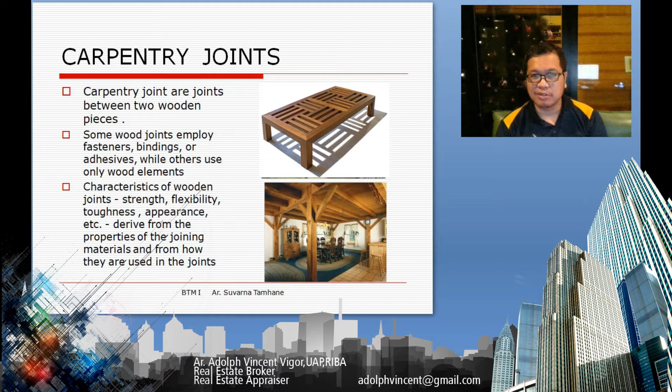So these are the traditional timber joints. Remember this, this is the first part A. This is part B, these are the non-traditional timber joints.

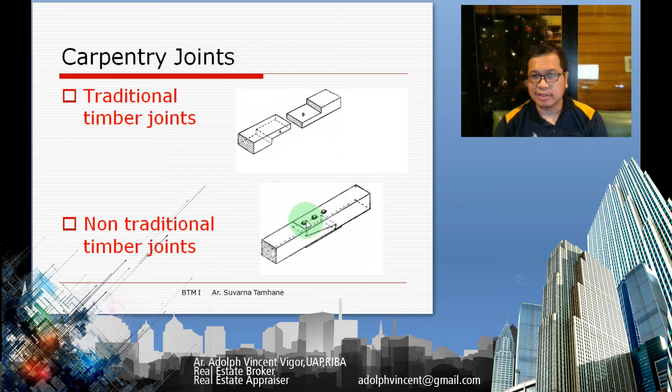So these are the types of joints: lengthening joint, widening joint, bearing joint, framing joint, angle or corner joint, and oblique shoulder joint.

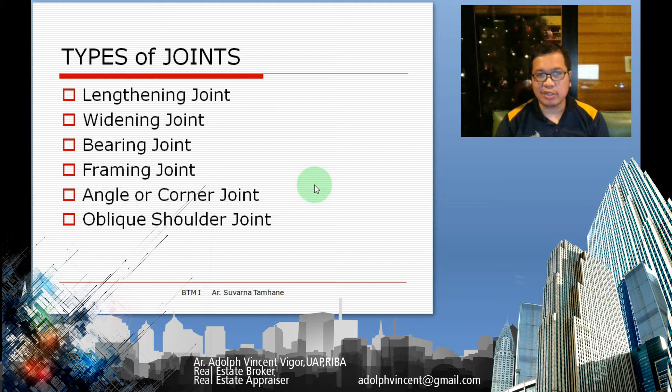A lengthening joint is a lap joint, used extensively in construction and cabinetry for framing. It's quick and easy to make and provides reasonable strength through a good gluing surface. They may be reinforced with dowels or mechanical fasteners to resist twisting. This is the example here, class.

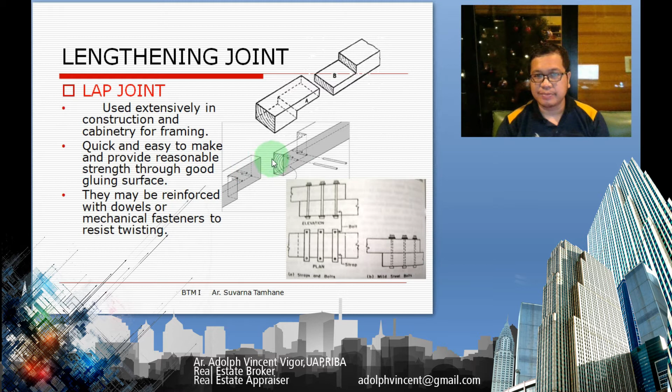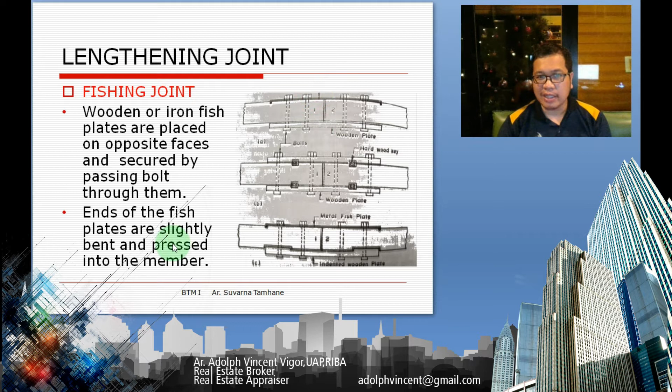Then you have a fishing joint, a type of lengthening joint in which wooden or iron fish plates are placed on opposite faces and secured by passing a bolt through them, just like this one—this is a bolt. The ends of the fish plates are slightly bent and pressed into the member.

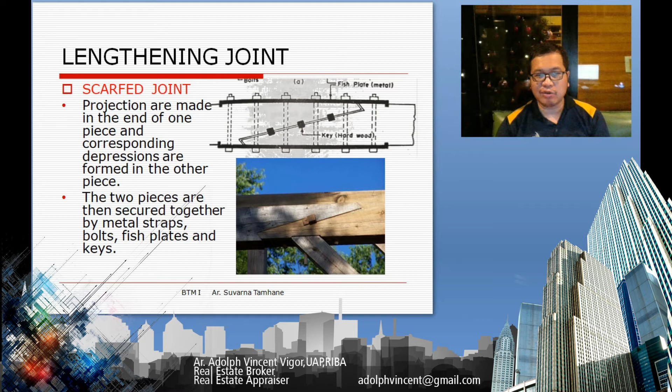Then you have what you call the scarf joint. This is a sample of the picture here. Projections are made in the end of one piece and corresponding depressions are formed in the other piece. The two pieces are then secured together by metal straps, bolts, fish plates, and keys.

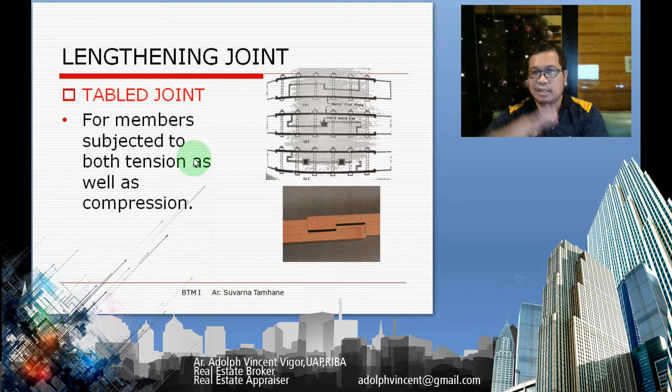Then we have a tabled joint here, for members subjected to both tension as well as compression. When you say tension class, it's like pulling two things together, and compression, like that. This is an example of a tabled joint here.

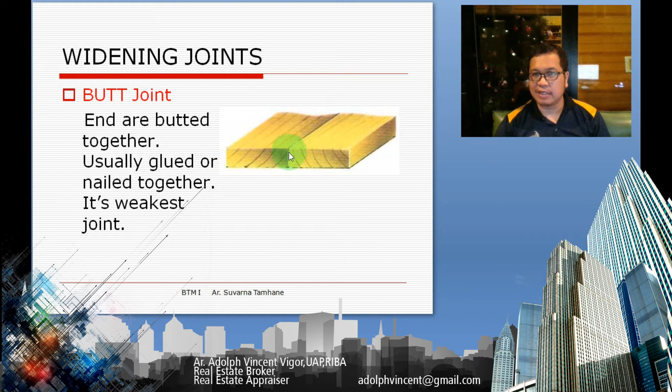Then you have widening joint. So you have a butt joint—the ends are butted together, usually glued or nailed together. It's the weakest joint. Example of this is like this. This is a butt joint.

We have a dovetail joint—a dovetail shaped key to fit in corresponding grooves. If this is a groove here, class, in order to fasten them together, you're going to fit in a key. I think this is similar to the Japanese construction techniques.

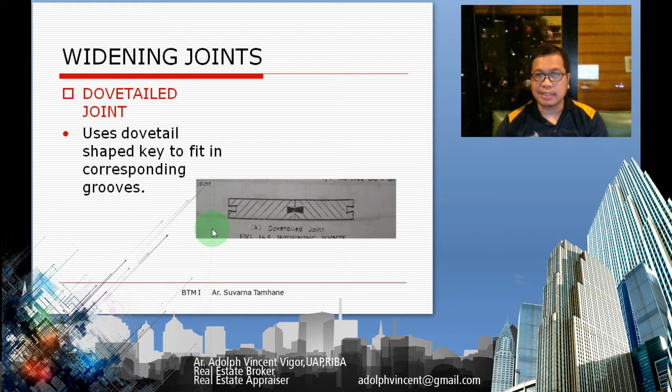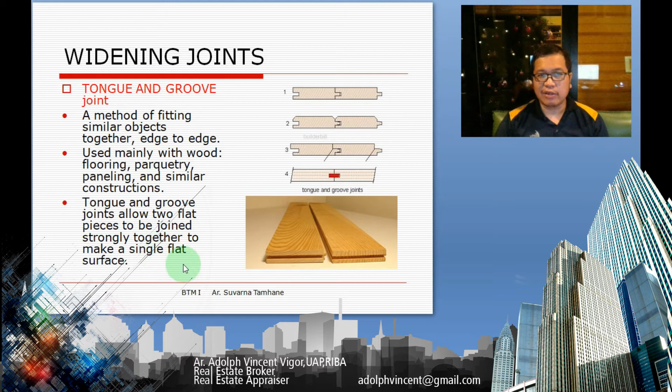Then you have the most common, tongue and groove—a joint method of fitting similar objects together edge to edge. Used mainly with wood flooring, parquetry paneling, and similar constructions. Tongue and groove joints allow two flat pieces to be joined strongly together to make a single flat surface. This is an example, guys.

Then you have a bearing joint—this is a dovetail joint. You can see here it's like the tail of a dove. They form a box joint where the fingers are locked together by diagonal cuts. The sides of each half of the joint are cut at an angle of about 30 degrees so that when the joint is assembled, the separate pieces are locked together. It's stronger than a lap or butt joint.

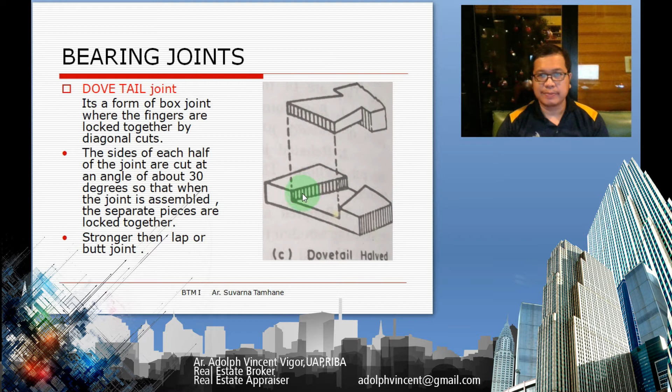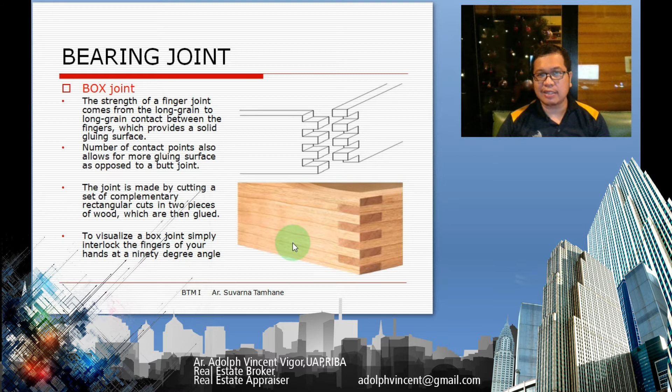Then you have a bearing joint—this is quite interesting, this is a box joint. The strength of a finger joint comes from long-grain to long-grain contact between the fingers, which provides a solid gluing surface. The number of contact points also allows for more gluing surface as opposed to a butt joint. The joint is made by cutting a set of complementary rectangular cuts in two pieces of wood, which are then glued together. To visualize this, simply interlock the fingers of your hands at a 90-degree angle. So it's like this, okay.

Example here is a mortise and tenon joint, another type of bearing joint. The mortise and tenon joint is simple and strong. The tenon is formed at the end of a member, generally referred to as a rail, and inserted into a square or rectangular hole cut into the corresponding member. This is an example—you can see here, this is a projection, this is a depression, and you just place them together. So this is a mortise and tenon joint.

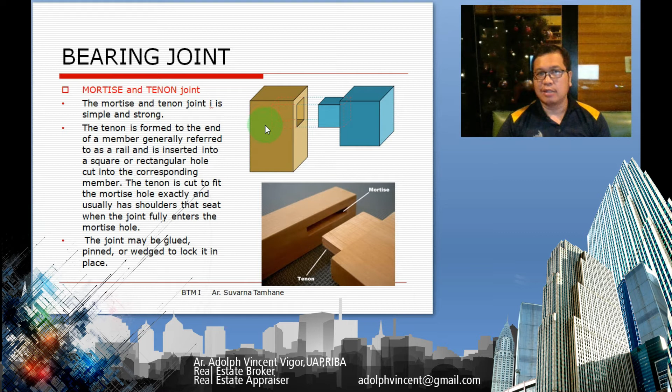Then you have a bearing joint—it's a half joint: angle half, bevel half, dovetail half, longitudinal half, and T half. This is an example here: this one is the angle half joint, the bevel half is a dovetail half joint here, this is a longitudinal half, and this is a T half joint.

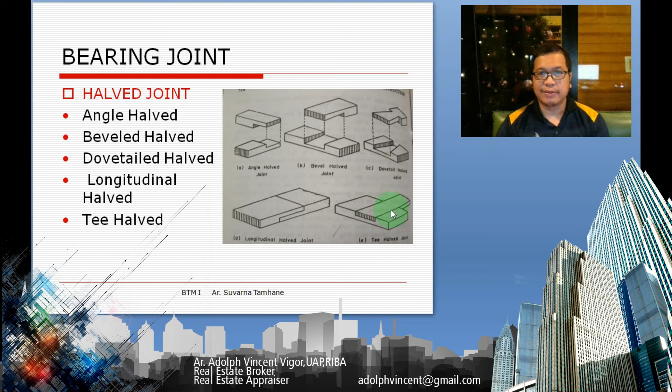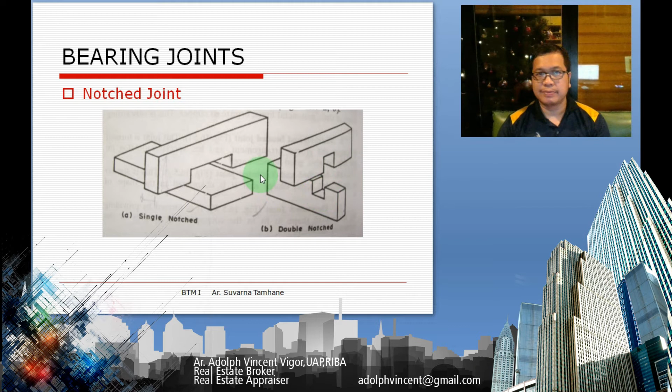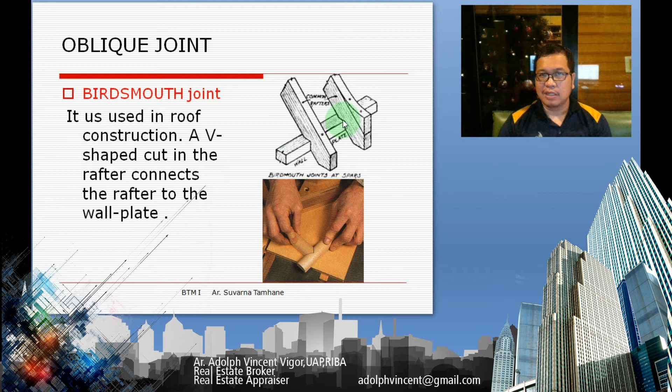Then you have what you call a birdsmouth joint, used in roof construction. A V-shaped cut in the rafter connects the rafter to the wall plate. As you can see here, if this is your rafter, this here is your V cut, and you're going to place it on the plate here, and nail it at these sides.

And you have the oblique joint, used in members to be meet at acute or obtuse angles. Examples are timber trusses. So here, this is an oblique here, and you're going to place a bolt to connect them together.

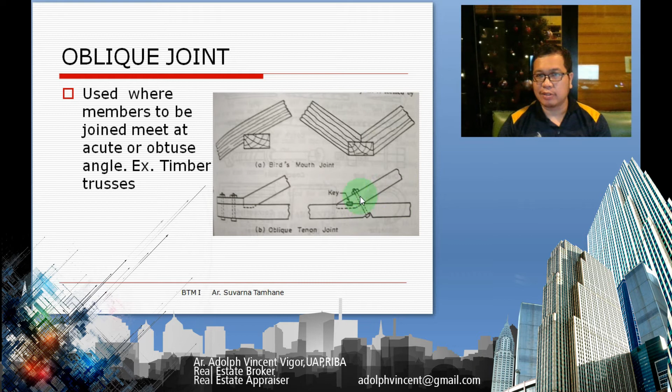Then you have an angle joint, used to join corners of frame. So you have the butt joint, the groove and tongue, the plain mitered and feathered, shoulder house, dovetail house tongue, and groove and mitered.

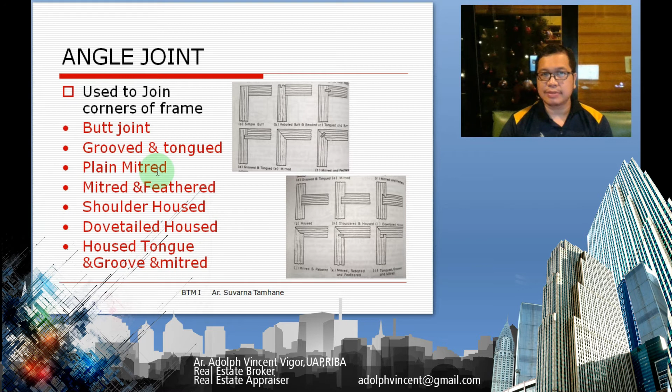Then you have the carpentry joints. There's a traditional method of improvement. Dowels, a small rod, is used internal to a joint to both help align on glue up and permanently strengthen the joint. Traditional joints are used with natural timbers as they do not need any other materials other than the timber itself. For example, here, the butt joint.

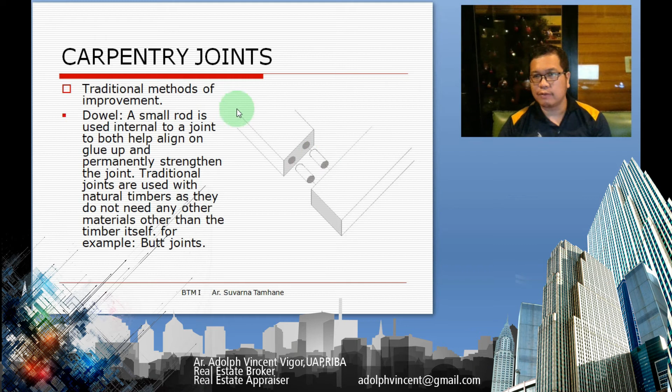No, it's not a butt, it's a carpentry joint. But still, you're connecting from end to end. We're going to use this as a connection between the two pieces of wood. This is a double notch joint here. So this joint is commonly provided at the junction of two members at a right angle.

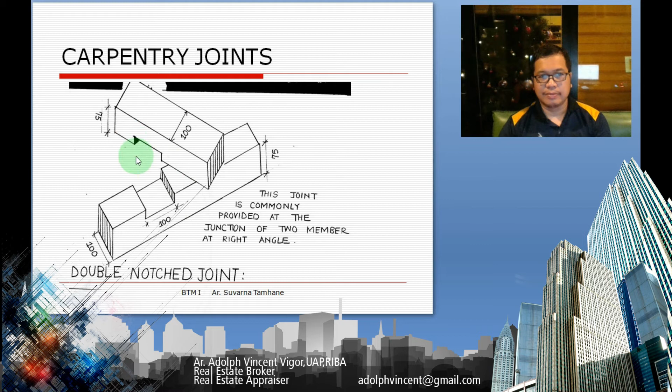This is another type of joint frequently adopted in framing wood. This is an open tenon and mortise joint. I think this is a more complicated class than the other joineries. I think the challenge, especially here in the Philippines, is to cut this into the exact dimension so that it would fit together. But I think you could easily do that if you use power tools.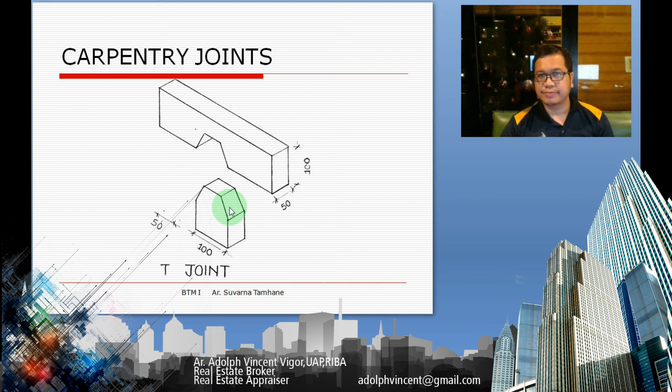And you have a single notch joint. This joint is commonly provided at a junction of two members meeting at right angles.

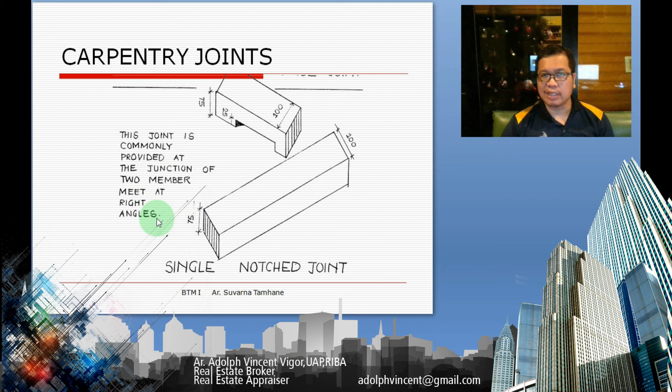Then you have a step joint. This type of joint is used in flooring, paneling, etc. This is known as the widening or side joint. So you can just imagine, class, how complicated this would be, the amount of skill needed to do this type of joineries.

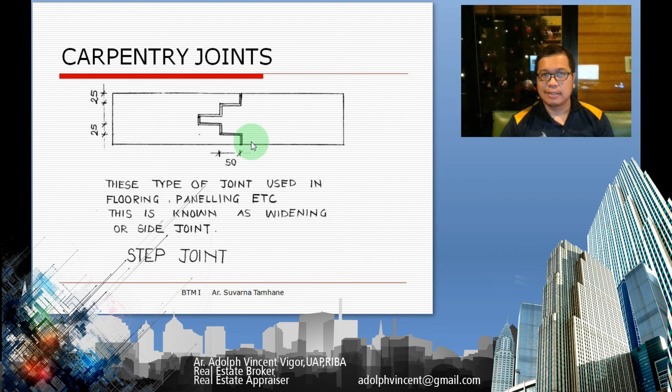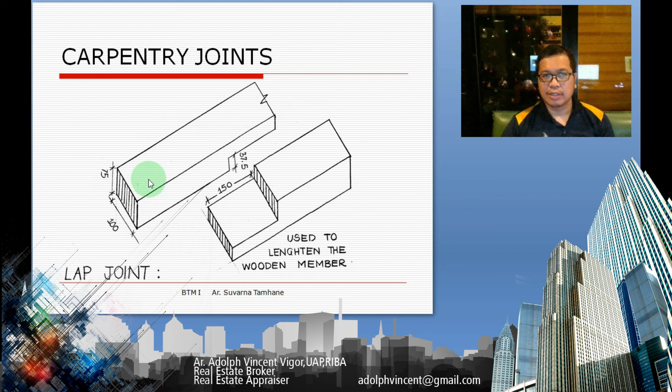This is a tongue and groove joint here. This is a type of joint known as widening joint. The joint is used in flooring, paneling also.

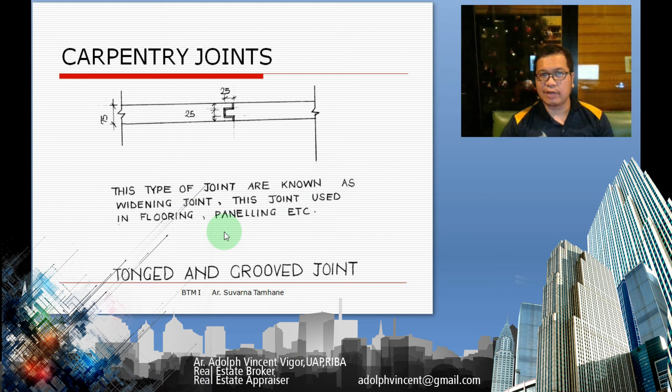And you have what's called a corner joint, used where two members are to be framed so as to form a corner.

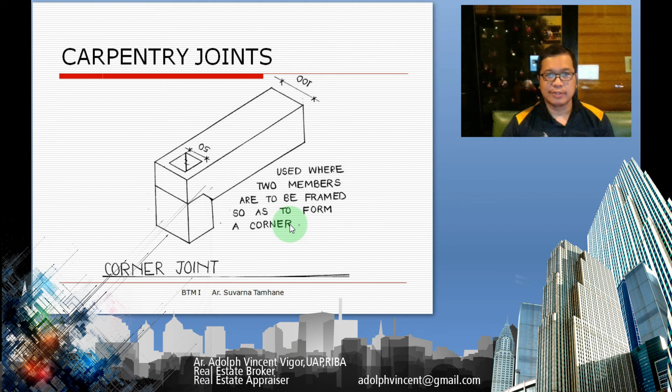I hope that you learned something, class, from our short lecture on the different joineries. I advise you to keep on reading and looking into the different details. I recommend that you research the book by Francis D.K. Ching. I don't want you to only research the joineries; I want you to think of creative ways on how to use the joineries, especially when doing your cabinetries, the connections for your rafters, or your wooden designs and construction.